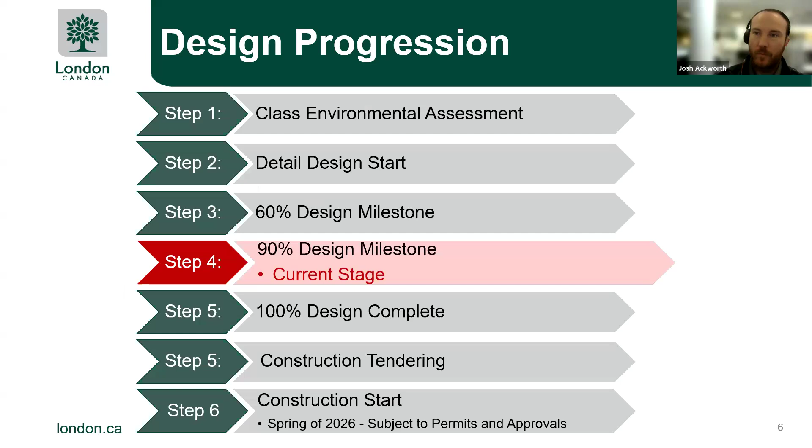I'm now going to hand it over to Andrew to speak about the mobility master plan.

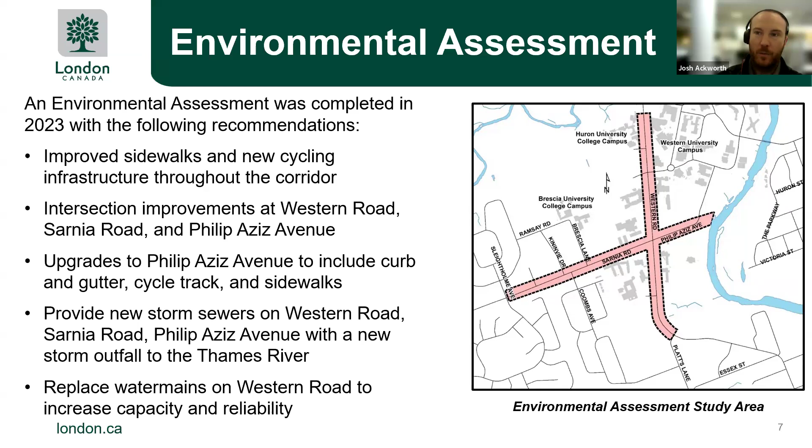Thanks, Josh. As we were completing detailed design, the mobility master plan was also being finalized, and that recommended that Western Road be classified as a rapid transit corridor with dedicated bus lanes to improve transit reliability and increase people-moving capacity. Also, a transit priority corridor was recommended on Sarnia Road in the project limits, which includes transit infrastructure only where needed to improve transit operations by implementing things like queue jump lanes or transit signal priority measures. Implementation of rapid transit is planned in about 10 years.

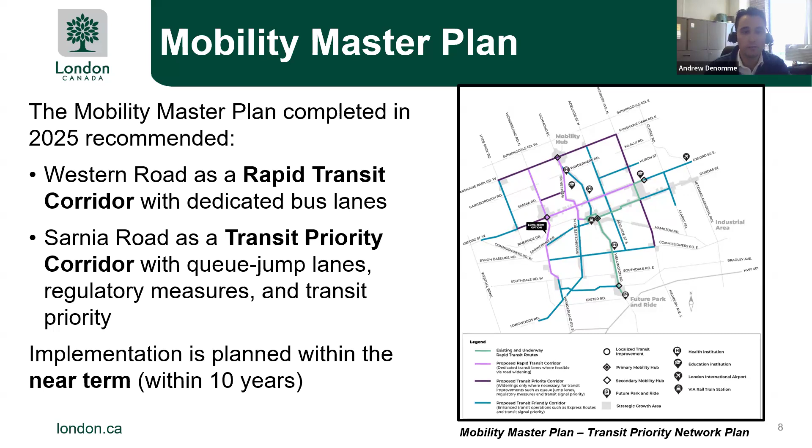The exact implementation timing of rapid transit is somewhat uncertain due to reliance on external funding. As a result, staff re-examined the recommendations of the 2023 EA to consider implementing interim priority improvements on Western Road while minimizing costs.

We recognize the expressed concerns and importance of safety for pedestrians and cyclists. Sidewalk and cycling improvements have been planned for 2026 construction, prior to Western Road being fully reconstructed to a rapid transit corridor. To minimize costs and traffic impacts, full reconstruction of Western Road and Sarnia Road to accommodate new storm sewers will be deferred until reconstruction is required to convert Western Road into a rapid transit corridor.

We'll now discuss in more detail what the interim plan improvements will include. Pass it back over to Josh.

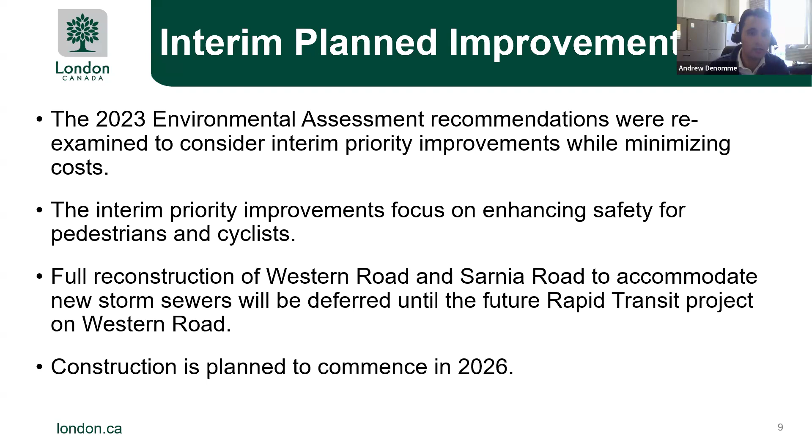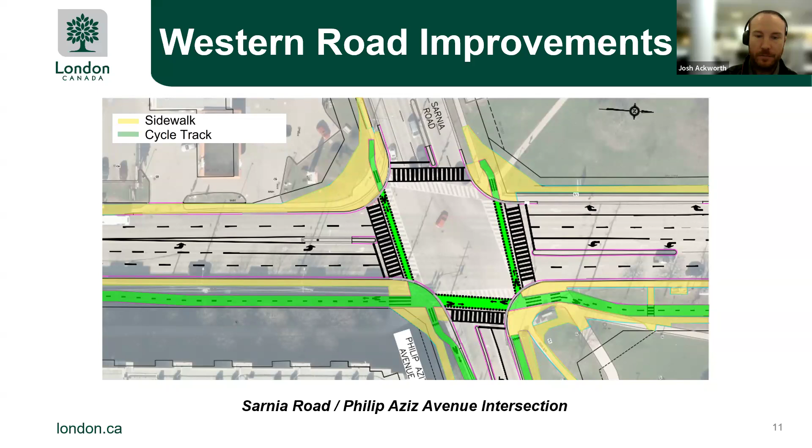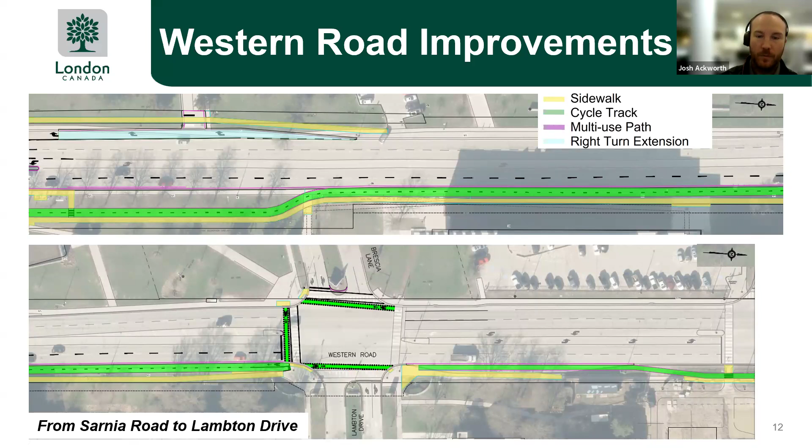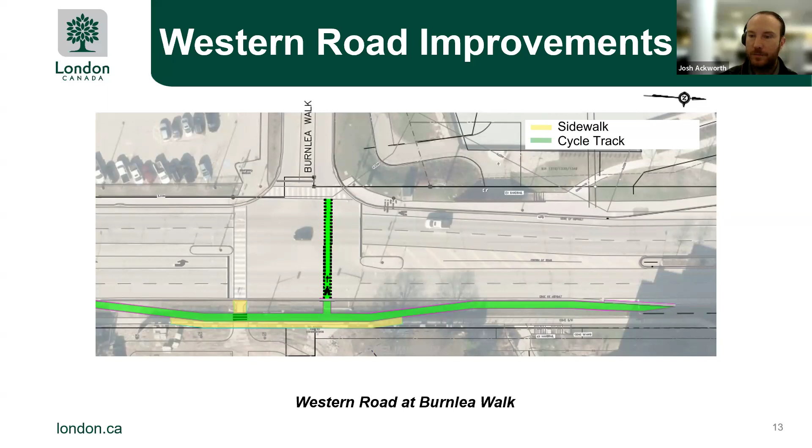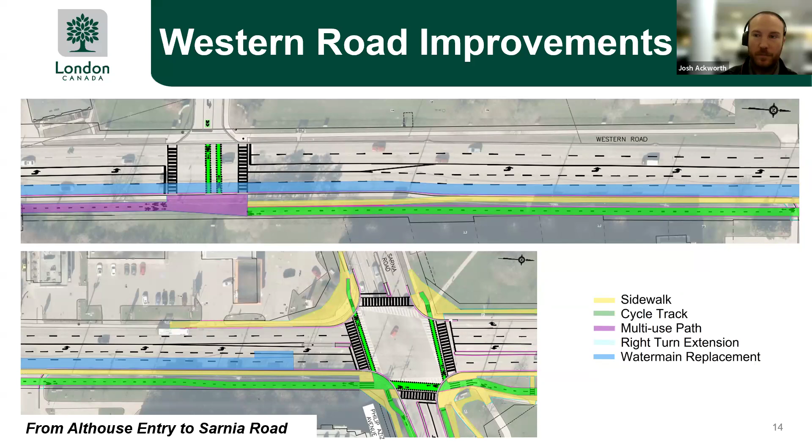For Philip Aziz, we're providing a 2-lane upgrade including cycle track, sidewalk, curb and gutter. We're also providing new storm sewers on Philip Aziz with a new storm outfall to the Thames River, and installation of the Western University sanitary force main coming up from the bottom of the hill.

On this slide, we're highlighting the cycle track in green and the sidewalk in yellow, showing what the corridor will look like upon completion.

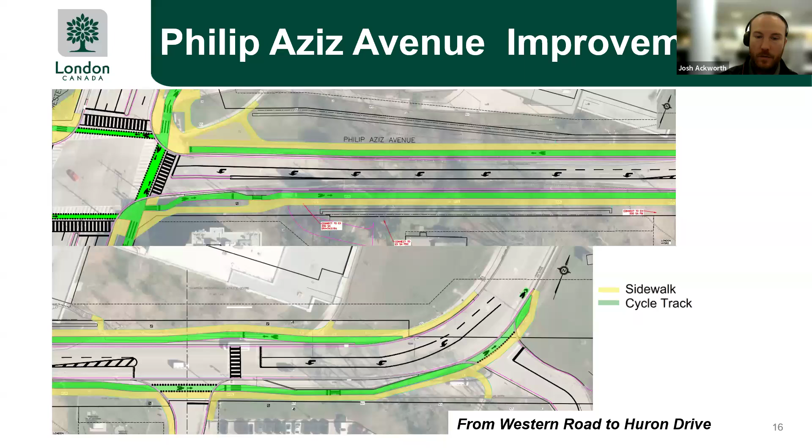For Sarnia Road, we're going to provide new cycle track and wider sidewalks. This is planned for 2027 construction. There's no change to the curb layout on Sarnia Road; it's mostly the addition of the cycle track and wider sidewalks.

Looking at the intersection improvements, in the interim we're providing wider pedestrian crossings at the intersection, and the crosswalks are being set back to try to shorten the distance from point A to point B across the road. The concrete sidewalks will have much larger waiting areas, and we'll also be providing new cycling infrastructure through the intersection.

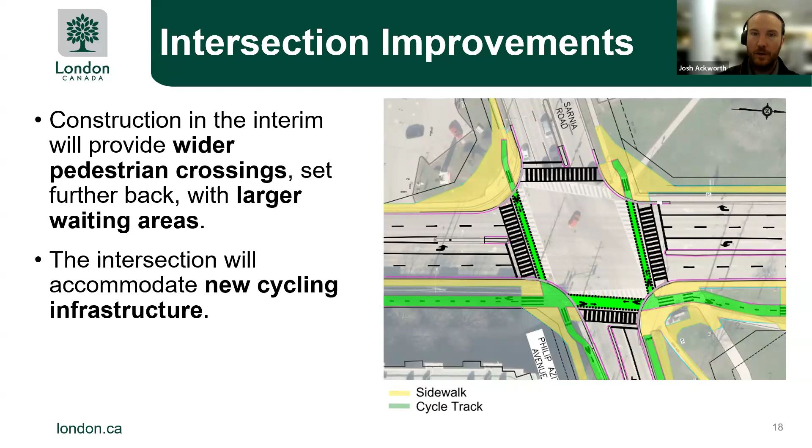A lot of these changes are to enhance pedestrian safety and the operations of the intersection. There will be a leading pedestrian interval, which gives pedestrians a head start before vehicles get a green light, improving visibility and reducing turning conflicts.

This is also recommended with a lagging left turn phase, understanding the demand for left turns in this area. So the signal timing will have delayed left turns: at the end of the cycle, after the through movement has completed, there will be a left turn phase.

There will be no right turns permitted on red. The combined leading pedestrian interval and lagging left turn, with no right turns on red, aims to enhance pedestrian safety and traffic operations.

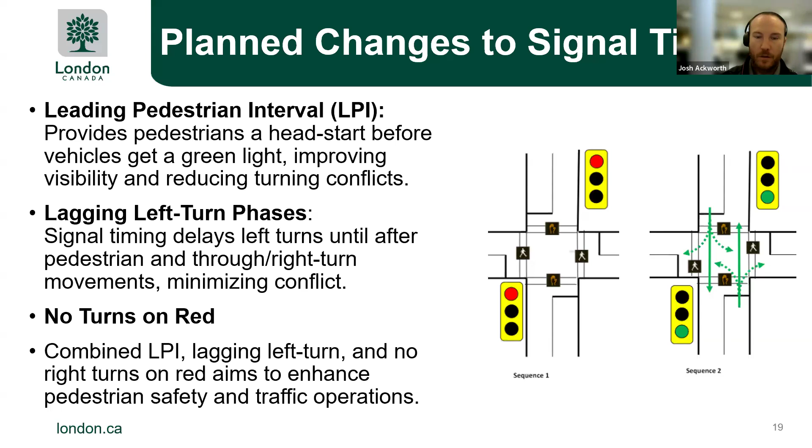Looking now at the tree removals, the red highlight shows where tree trimming or full removal will be required. The tree depiction in the bottom left corner shows that the root system extends beyond the tree canopy. In some cases, construction won't necessarily be within the drip line of the tree, but we'll be impacting 30% of the root zone, which will require removal of the tree due to the amount of roots impacted.

With the water main work and the cycle track being on the east side of the road, a lot of the tree removals are isolated to the east side of Western. Large vegetation removal is also required along Philip Aziz where the retaining walls will be placed and the gabion baskets removed.

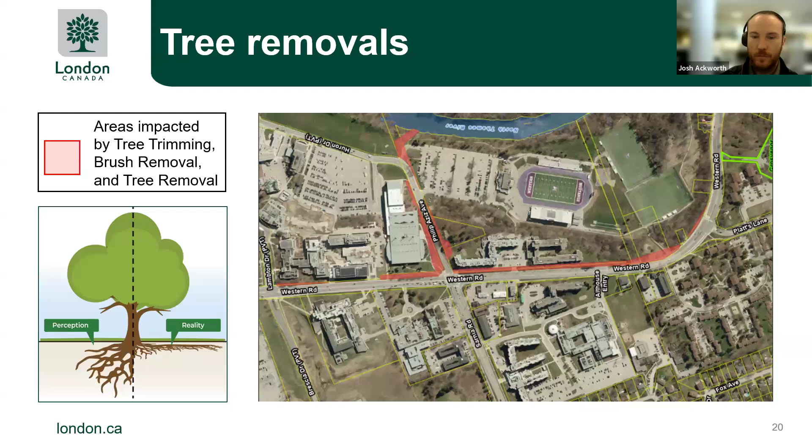Moving on to traffic management. For drivers, there will be reduced lanes through the project limits along Western Road. Access will be maintained to commercial areas and residences during construction.

There will be a full road closure on Philip Aziz Avenue from the east side of Western Road to the Thames River. Access to Alumni Stadium will be maintained via Huron Drive for the duration. Construction activities will continue to be coordinated with Western University and the London Transit Commission.

There will be a pre-construction public meeting, and at that time we'll communicate further on traffic management.

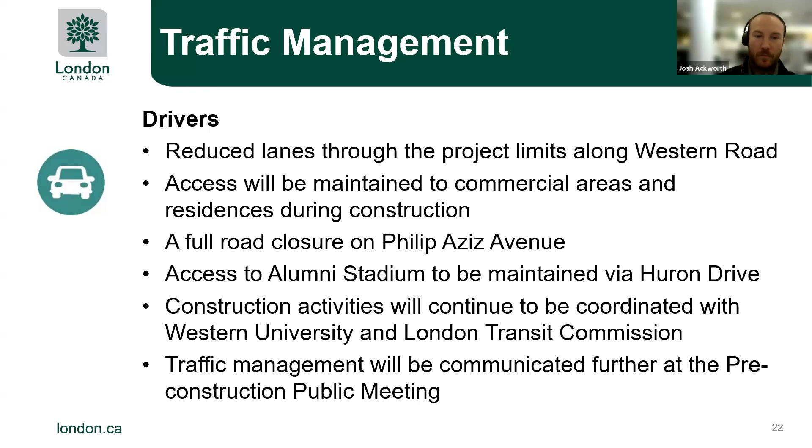For sidewalks, any closures and restrictions required during construction will always leave at least one side of the road open, or access to and from Western to the surrounding area. We'll have wayfinding signs in place to help guide people walking through the construction zone safely.

Some LTC stops may be impacted while this work is underway. Transit riders are advised to visit the LTC website for service updates during construction.

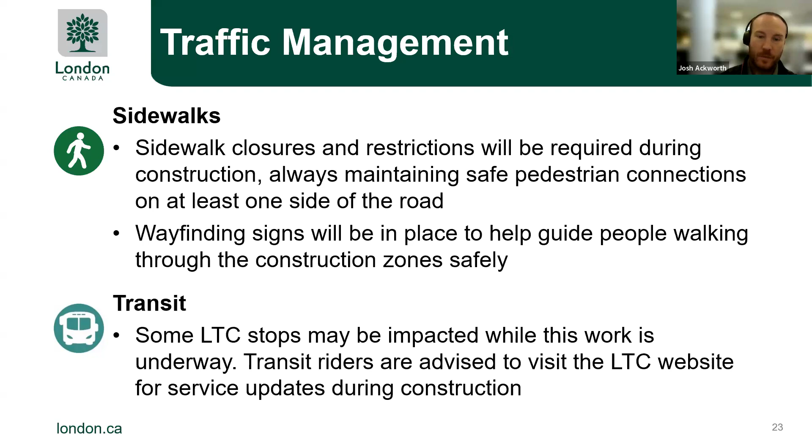Some upcoming activities before construction will occur in the fall and winter of 25-26. Advanced tree removals are to be completed before March 31st to avoid impacting bird or bat nesting windows. Utility investigations, likely in the way of a vac truck doing exploratory work, and also some utility relocations in advance of the main contract, to make sure we don't have conflicts when we get there for construction.

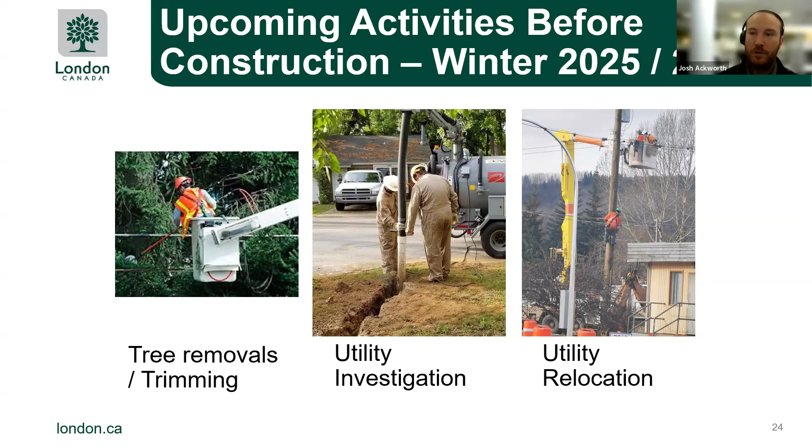Activities between now and construction: finalize the detailed design in fall 2025; advanced tree removals in fall/winter 25-26; project tendering and award in winter 2026 for a contractor; advance construction notices two weeks prior to construction; and before construction, after project award, a public update meeting as stated on the previous slide, followed by construction from spring 2026 to December 2026.

And I'm going to turn it back over to Taylor.

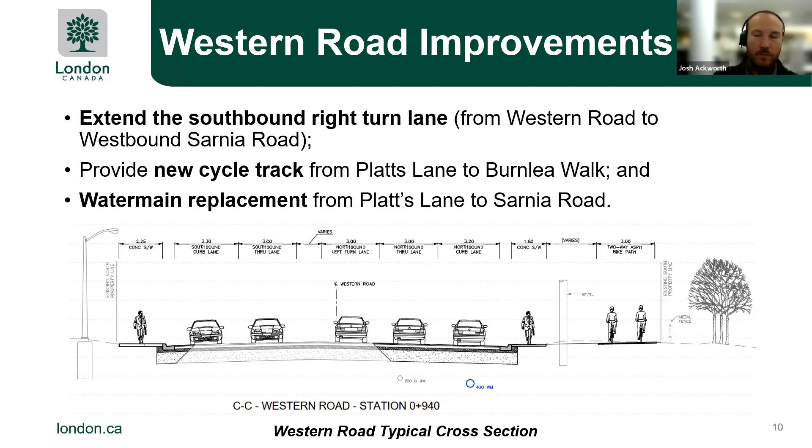We're trying to maintain a minimum 2 meter sidewalk everywhere that we can, and a 1.8 meter bike lane or cycle track. So I'll just flip to the Philip Aziz section here, and again, 2 meter sidewalk, 2 meter asphalt path on both sides of the road for pedestrians and cyclists.

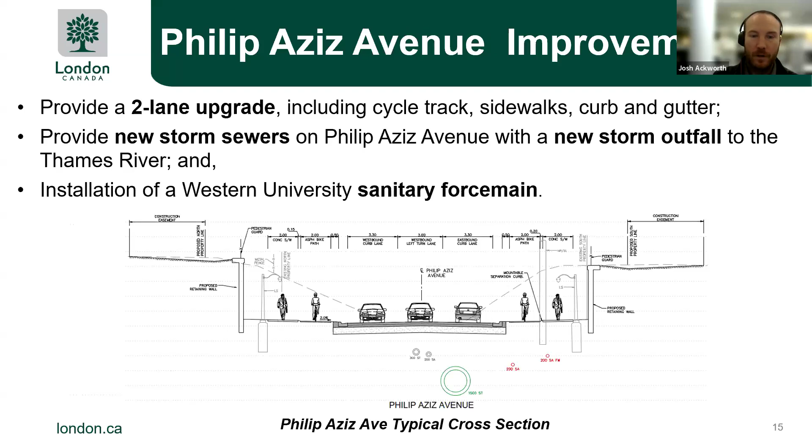And then if I jump to Sarnia Road, again, 1.8 meter sidewalk and 1.8 meter bike path on one side. And where we've got the hydro pole and street lighting conflict, you've got a 1.6 meter bike lane and a 1.8 meter concrete sidewalk.

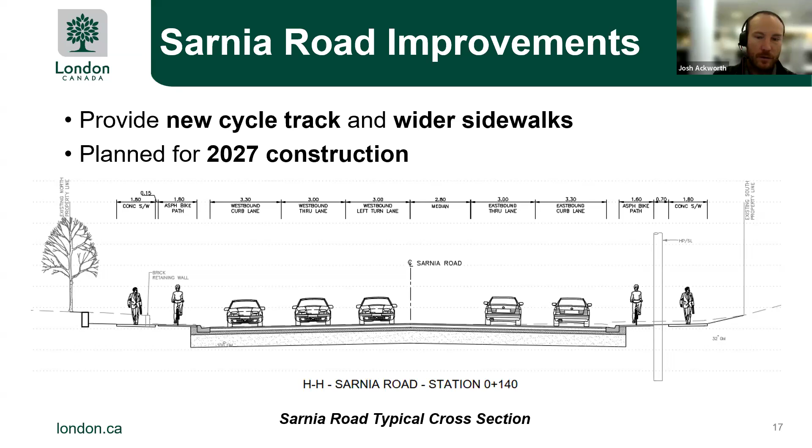Andrew and John, I know we touched on this, but someone is asking where we can find the comment forms for the Sarnia and Coombs intersection. Could you give some more information on that?

I think the best thing to do is just to email me directly at the email address on there. We'll give you some more information from there. Thanks, John.

Yeah, so what we're looking at is a spring start to December of 2026, and obviously there will be top coat asphalt and some cleanup work in 2027, as well as Sarnia Road moving forward in 2027.

The intent currently is to start construction after exams are over and the Western University population is significantly decreased, and then through the spring, summer, and fall to get this project completed.